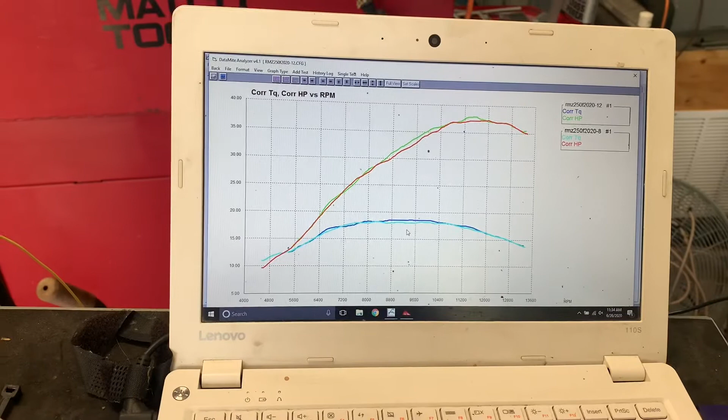Good boy. All right, we finished up that run. Green line is one of those runs. Red line is another one of those runs. Which one do you think it is? Which one do you guys think is air filter on and no air filter? Well, if you guessed that the green line was no air filter, no cage, you would be correct. That is no air filter, no cage in green, and that is air filter and cage in red.

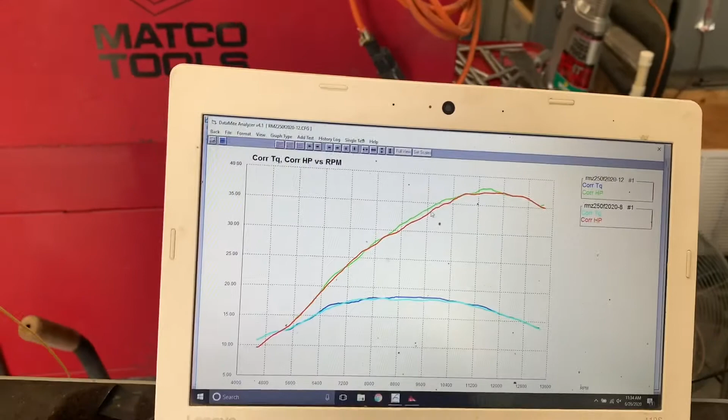Now, something to note is that this changes the mapping a little bit. So some of this power has to do with mapping more than it has to do with airflow, but that's neither here nor there. The question being, if you improve the airflow into your motorcycle, will you pick up some power? And in this particular case, the answer is yes, you picked up a little bit of power.

So how much? Well, pretty darn good. Right there at 9,600 is 1 horsepower. Man, you just bolted on 1 horsepower. This day and age, that's hard to do. You guys, I don't want to go out and bash anybody, but there's probably more power right here than there is with the pipe. So right here at peak, we also picked up not quite a horsepower, picked up 0.7 of a horsepower, but the bike's dang near 38 horsepower now.

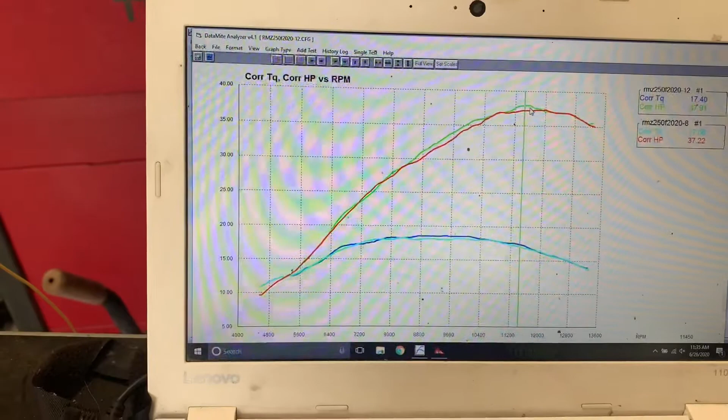And then it mirrored itself up way up top. Now, usually, good airflow improvements find power all the way up top. That's actually where you generally are going to see airflow make the biggest gains. And that's why I brought up mapping.

Because when you increase the amount of air that's capable of getting into the engine, you're not going to be getting an increase in fuel. The fuel injection is not that smart. Unfortunately, it's just a lookup table. So this has leaned out the bike a little bit, and as a byproduct of it, in addition to the airflow, we've picked up some power and some performance.

On the track, this is going to be very noticeable. You are going to notice, because this is really where you ride. You're going to ride through here and up over the top. This is very noticeable, so that's a good improvement.

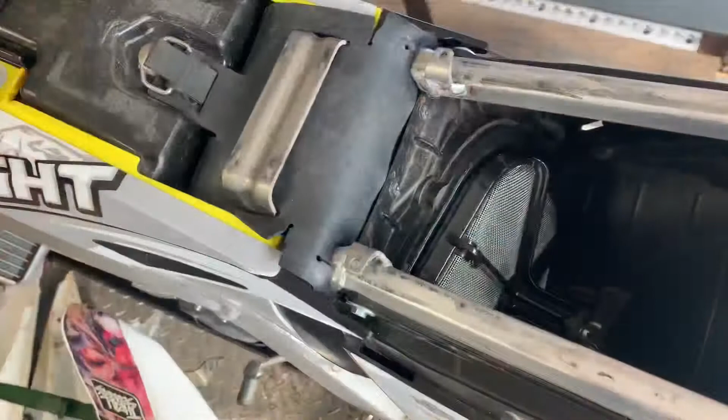So the next test we're going to do is we're going to take the air filter off the cage, and we're going to just run it with the cage. So the question is, is it the air filter, or is it the cage? Or is it both? Well, we're going to find out here in just a second. Fellas, as you can see, we've got no air filter but the cage installed. So we're going to move forward with this test and see if there's any difference between having the air filter on or the air filter off and just the cage. This will kind of tell us if it's the cage or if it's the air filter.

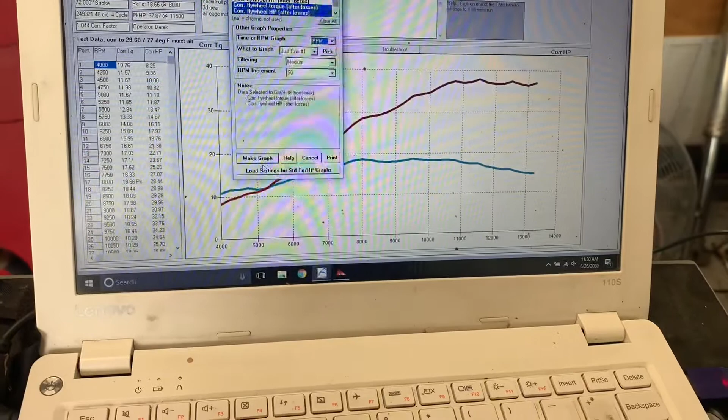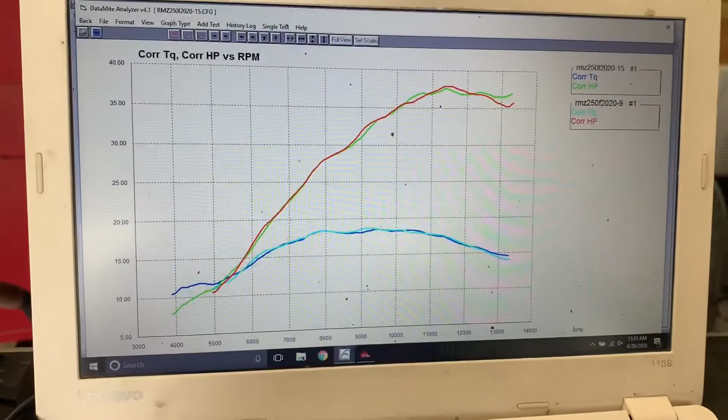Fellas, the verdict is in. Let's see what the data says. We're going to look at what no air filter but yes with the screen on the filter cage looks like versus absolutely no filter, no cage. All right, so the green line is no air filter but air filter cage and screen installed, and the red line in this particular chart is no air filter, no cage, no screen at all.

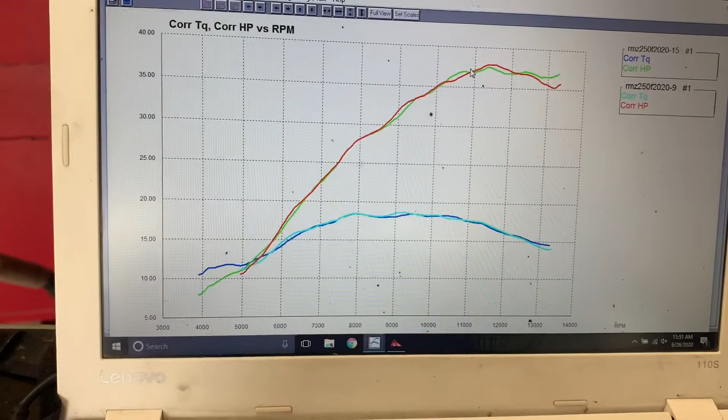As you can see, they're very similar. They did both gain versus standard. Down here, we'll pull that up. Up top, there wasn't quite as much power with the air filter cage installed with a screen, but with no filter, as there was with absolutely nothing. But way up top, we actually picked up, and this was on every single run, so all of the data looked like this. So right here, a little bit of restriction was better than absolutely no restriction.

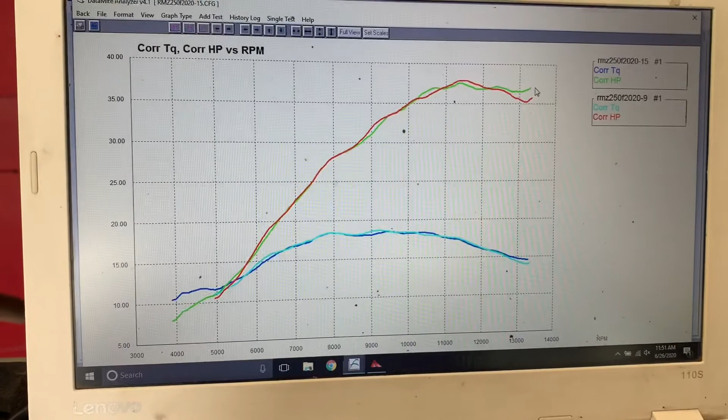Now, is the reality that restriction is good? No. The reality is it's going to come down to mapping. In a future video, follow along, and we're going to show you that with some GET ECU tuning, and we'll get more in depth about air-fuel ratios and what they can do, as well as tuning on the high end and in areas like this.

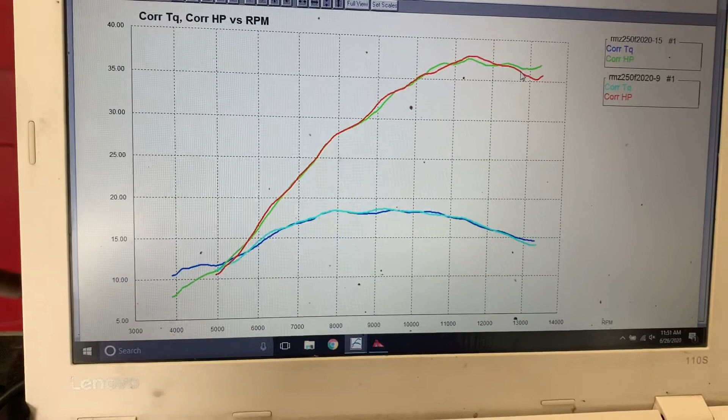So clearly this bike is mapped very closely for the stock setup. Anytime you get way outside that range, okay, or I should say even change it a little bit, the mapping becomes less than ideal. And so what happened here was with the air filter screen or cage and screen installed, it really liked that in the mapping department here, but it didn't like absolutely no restriction here, which means that it was getting a little bit lean like that.

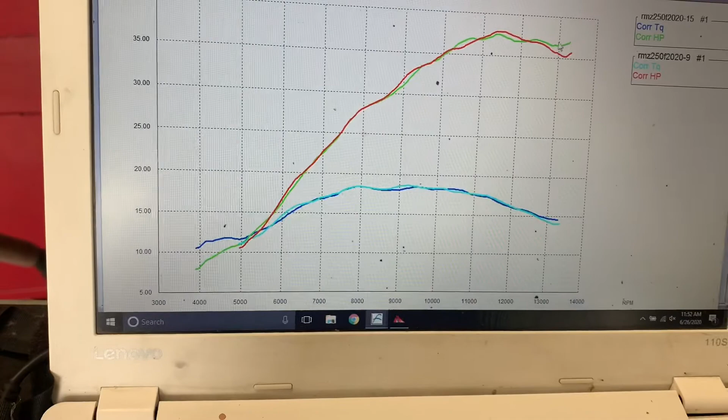And then with the air filter and cage installed, it kind of mimics right here. And so what we're going to have to isolate is if that's a mapping thing or if this picked up because of air or mapping. So we're going to take a look at that later.

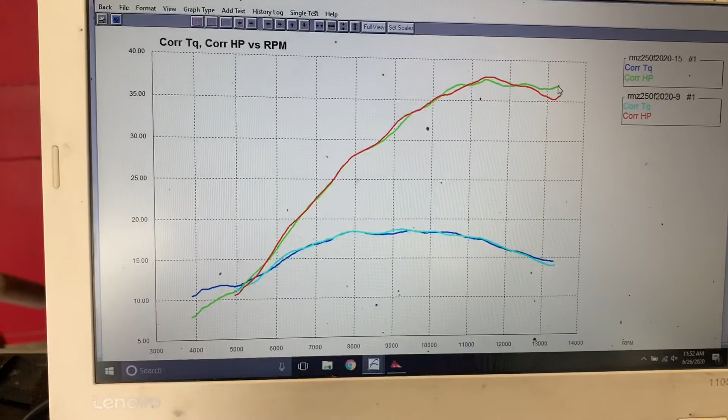Anyways, if you got one of these bikes and you're trying to find some power, I hope this info is helpful to you. I hope that you liked it. I hope that helps you make a decision on what you go with and what you purchase. And if you're trying to find power very easily and quickly with your bike, hopefully this helps you in that direction.